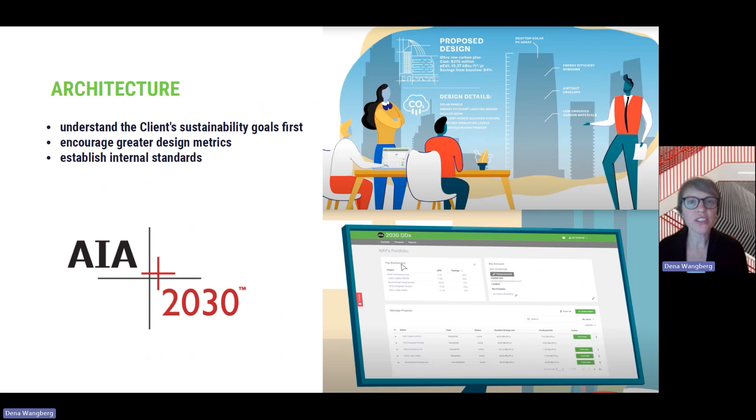Construction professionals probably bear some of the greatest weight of the ACE field, as they are primarily responsible for the implementation of the project's sustainable design. Contractors hold the checkbook for purchasing products and materials, and they reign over the job site: how much it pollutes air, soil, and water, how much landfill waste it produces, and how effectively workers do their part to advance high performance.

The Associated General Contractors is just one professional organization that stands behind the contractor's commitment to sustainable building practices, the industry's way of assessing and tracking what it means to be a green contractor. Created by contractors for contractors, it's a great way to get started on a sustainability journey, or for those who are well along, to apply a yardstick to their progress.

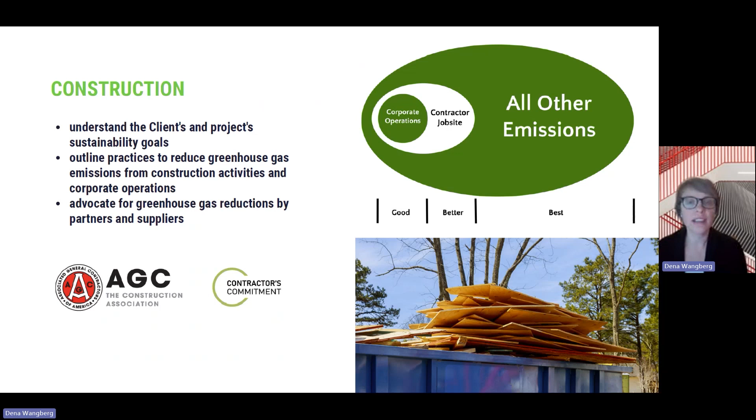Similar to the responsibilities of the architect, engineers are an important part of the team's sustainability strategies from the earliest design phases. Engineers must be collaborators on solutions that will meet resilience goals, but also work within the project's budget and needs. To that end, various professional engineering societies have established guidelines and commitments to sustainability for their members, understanding that there is an imperative to take informed and intentional actions now to both reduce greenhouse gas emissions and adapt to the impacts of a changing climate.

To talk a little more about carbon emissions and what that means, I'll pass it over to Lindsey.

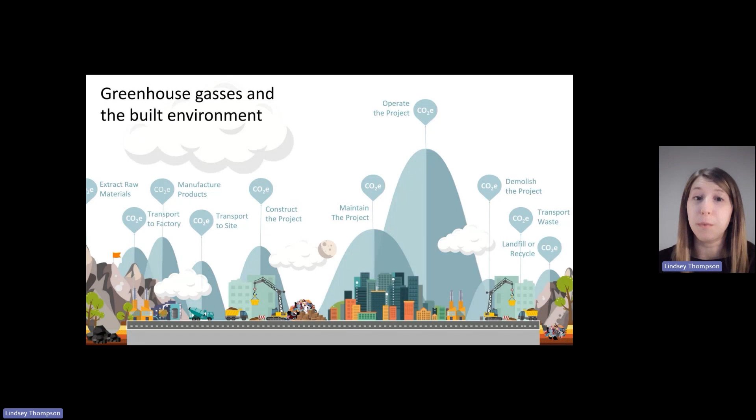In order to meet our organizational commitments, the first step is understanding what types of carbon have the largest impact on our work and where we have the most control. When looking at the entire building life cycle, we track carbon along all stages, from sourcing of the material through the end of life. Specifically, embodied carbon is the amount of carbon and greenhouse gases associated with a product throughout its entire life cycle.

So when we start to select materials, it's important that we look at the carbon impact of that material. There are three main ways to do that. The first is to reduce the amount of added material in our work altogether. Where there's no material, there's no carbon. So in general, less is more when it comes to reducing the amount of material.

The second is to know the content in your material. What ingredients are going into the material you're looking to select? Are there alternatives out there that provide the same amount of aesthetic you're looking for and performance when it comes to where that material is being applied? In general, it's always good to do your research and make sure there's not a better option out there for you.

The third is to know where your material is being sourced and how it is being manufactured. Those two things can have a big impact on the amount of carbon in a material. So opt for readily renewable or responsibly sourced materials, and make sure you do your research to understand how those materials are being created. What is the manufacturing process like? What type of energy, and how much, are they using to create that material? With these three things, and knowing your material well, you should be able to reduce the amount of embodied carbon within your work and make educated decisions about your materiality.

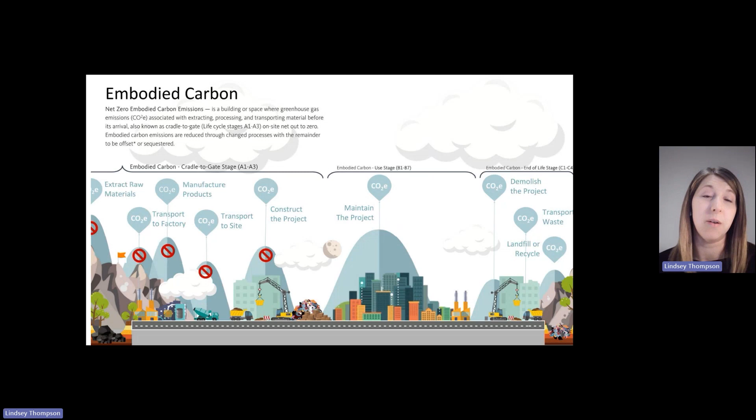Thanks, Lindsey, for walking us through that. So Lindsey talked about embodied carbon, which is the amount of carbon used to build the building. What we're going to talk about now is operational carbon, which is the amount of carbon you're using over the lifespan of the building.

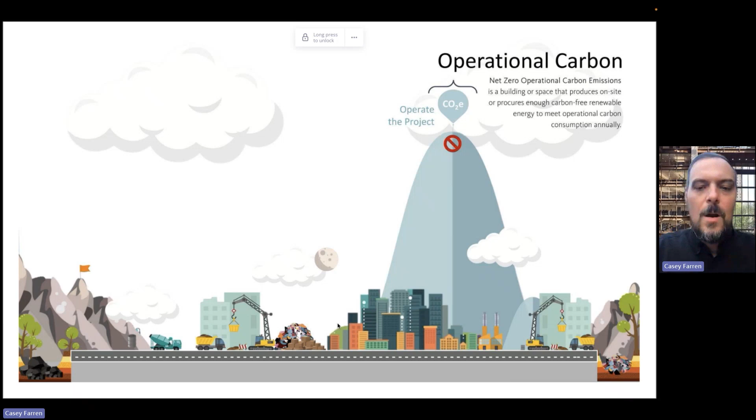That comes in essentially as an equation from two parts. One is what we already talked about a little, which is the amount of energy you use, your operational energy demand. That's a combination of your lighting power density and the amount of energy you use: lighting, heating, cooling, all the different things you have plugged in, TVs, refrigerators, all that.

Coupled with that is where your fuel comes from. All energy, the energy grid, is made by fuel and powered by fuel. Here in Raleigh, most of that comes from Shearon Harris, which is the nuclear plant just south of town. But it can also come in the form of natural gas, oil, or coal. Natural gas, oil, and coal are the three really high-carbon types of energy used in energy plants.

The other options listed here, and this is not an exclusive list, include nuclear, like I mentioned, wind—we have a lot of wind turbines off the coast here, though you see those a lot more in the Midwest—solar, with a lot of solar panels going up around North Carolina, hydropower, like the hydroelectric dam at Lake Hyco just west of Raleigh, geothermal, which uses water going into the earth to help power and cool your building, and tidal energy as another option.

But all those go together to create the amount of operational carbon you're using for your building. So that's talking about greenhouse gas emissions and your operational carbon consumption, and those all together make up your operational carbon footprint.

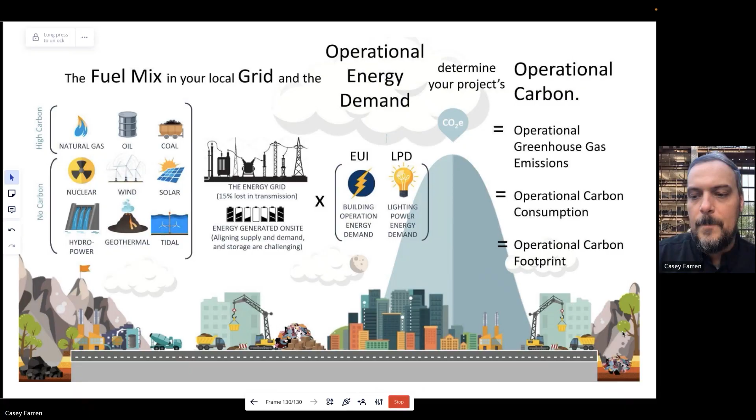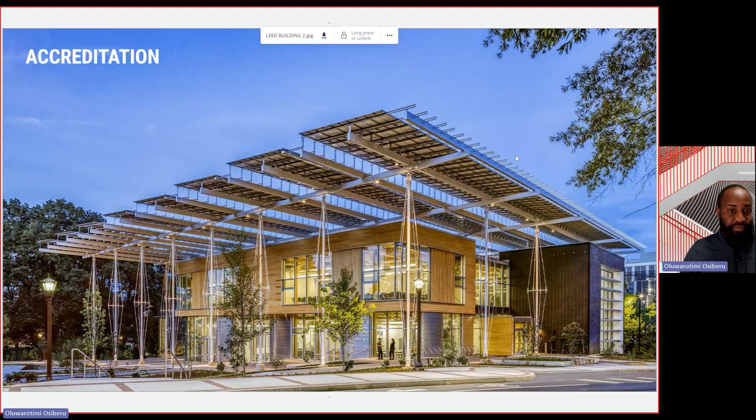So what is accreditation? Why is it important? Sustainability accreditation is a verification and certification process conducted by an independent third party to acknowledge that a development or building has attained a certain level of sustainability. It is important because it serves as a way of verifying that buildings are functioning and operating as intended in terms of sustainability.

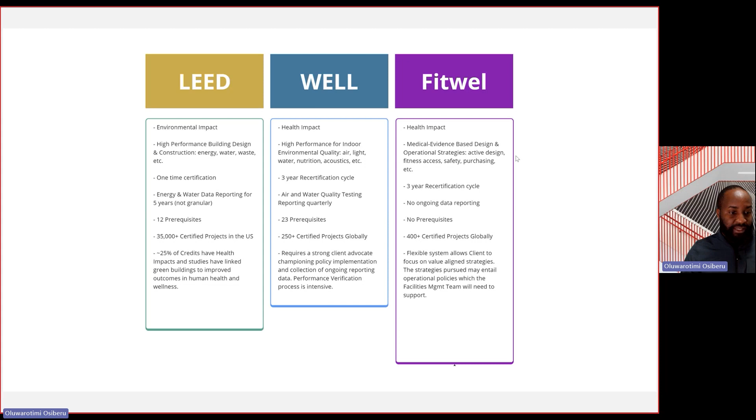There are a lot of sustainability certifications, and here are three very popular ones: LEED, WELL, and Fitwel. LEED focuses on environmental impact, while WELL and Fitwel focus on health impact. There's a lot of crossover within these certifications, so it's possible to get multiple, because some certifications help with getting others. Looking at the number of projects, you can tell LEED is the most popular certification in the US, and that is the one we will be looking into in this class.

So what is LEED? LEED stands for Leadership in Energy and Environmental Design. It has project typologies which go from the small scale of homes to the large scale of neighborhood development. For the class, we'll be using base building, because you're doing new construction. So your projects will be classified under base building, new construction.

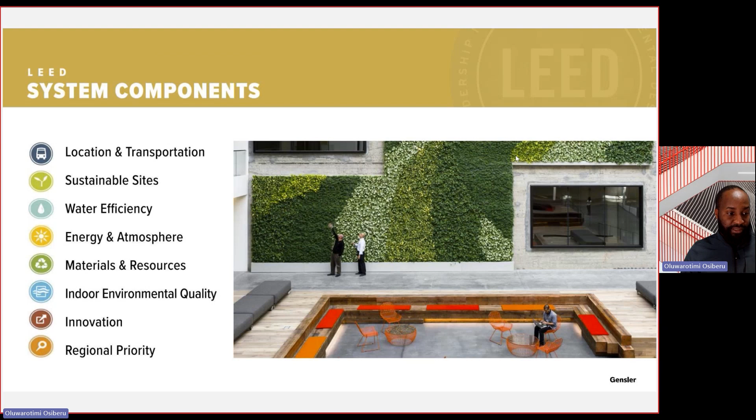So what are the categories? Location and transportation, sustainable sites, all the way to regional priority. Each category has a number of ways you can get points to help achieve the category. Depending on the number of points you get, you can go from being LEED certified to LEED platinum, based on how many points you get in all the categories.

So what is the process? You register your project, you document it, you send in your documentation, it is reviewed, and based on your points, you get certified. There is a registration fee for LEED, which is $1,200.

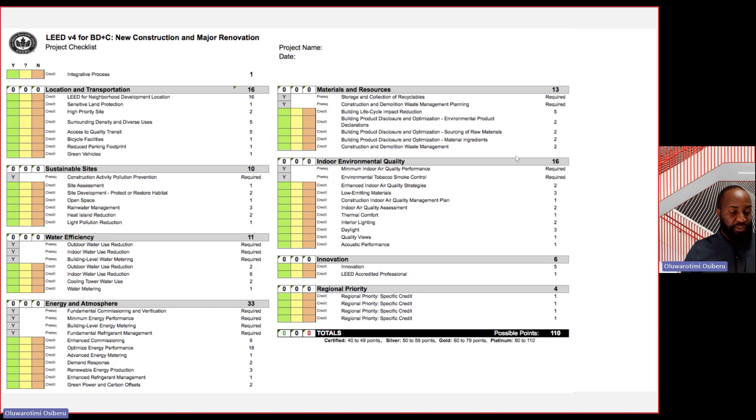Here's a brief overview of a project checklist with the breakdown under each category and how many points you can get for each subcategory. On the LEED website, they also give you more instruction as to how you can achieve each credit.

In conclusion, LEED transforms the way buildings are built and operated, and at the end of the day, it improves the quality of life for those in the building and those of us outside the building, the community, and the rest of the world. Thank you.

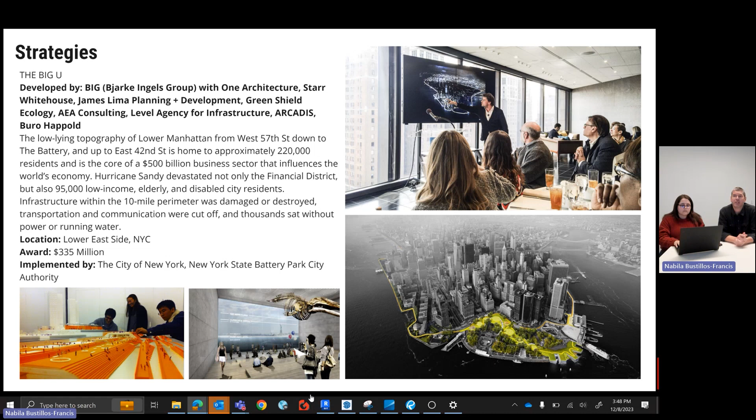So they're trying to use different technologies, parks, hard walls, and terraced landscapes to help mitigate this risk. The whole town is involved, from the architect, BIG (Bjarke Ingels Group), to a ton of people from the city. City planners are getting together and having meetings, talking about the risks and what they want this thing to look like. They want it to be a park, not a giant concrete barrier around the city. They want the city to engage in this process and design. As we go forward, the public is involved in those conversations, and it will be an exciting design that will also help lead the future of coastal cities into different ideas.

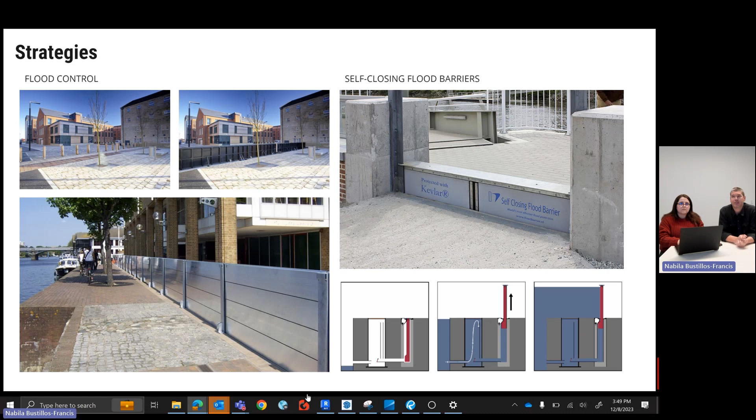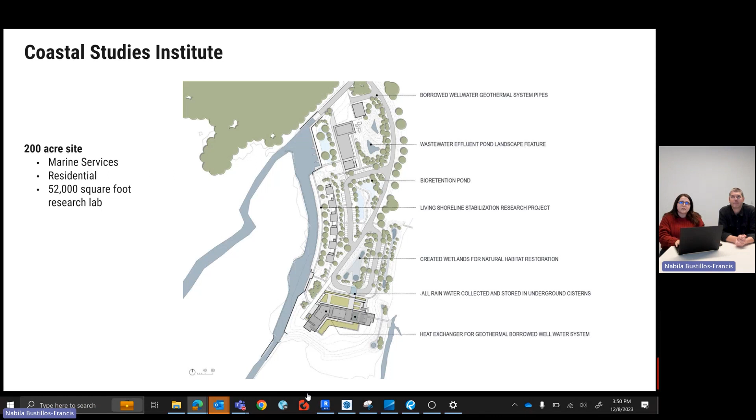Zooming in to the lab building, they use very similar systems on a smaller scale: rainwater collection, PV panels, condensate collection, on-site wastewater treatment, geothermal, and wetlands in the surrounding area used for natural habitat restoration.

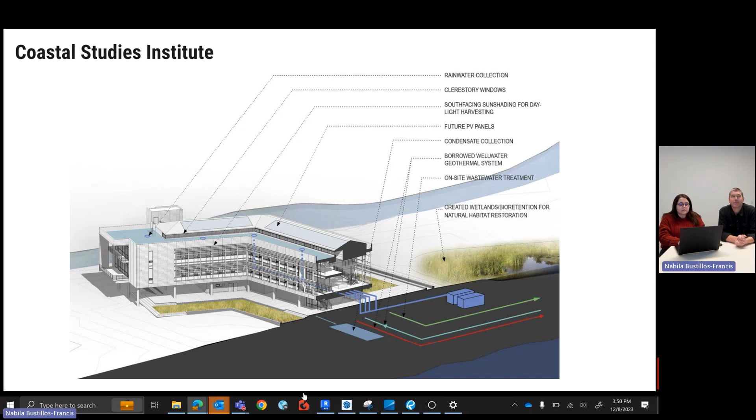With that, they also thought more about daylighting, which is something that encourages a lot of the form of a building. Most buildings try to keep as much daylight in the project as possible while still being efficient. One rule of thumb is that daylight only reaches about 30 feet into a project. So if you want daylight through your entire project, it probably shouldn't be more than 60 feet total, or thereabouts, depending on what spaces you're trying to daylight.

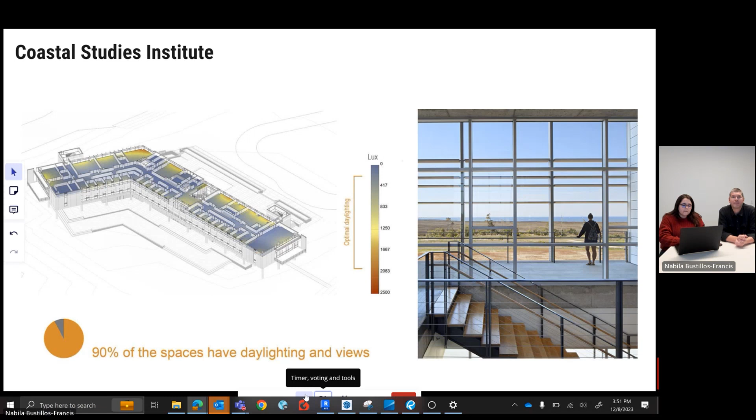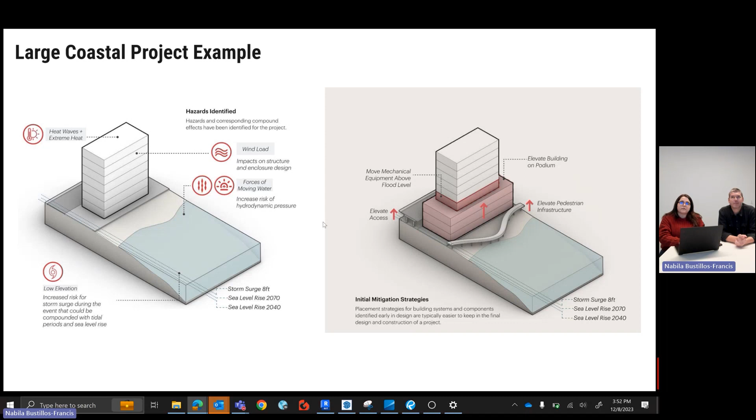They continued to develop more ideas, adding layers and layers to the project that considered people's safety, the safety of the project, and making sure everything ran smoothly. So you can see how something very simple, like a building on the shoreline, can become something much bigger. Thank you, thank you very much.